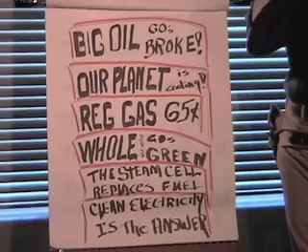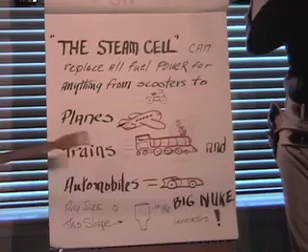Hi folks, I have something free for you. My name is Teddy Daw, I'm the medicine man. Of all the things in this whole world that might do the most to save our planet, it could be my steam cell.

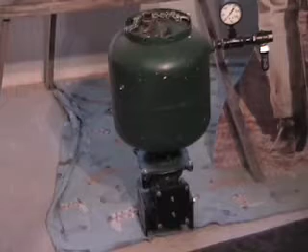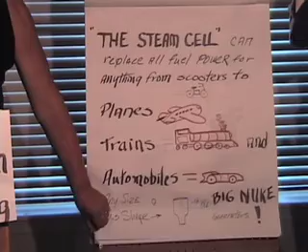It simply makes steam from electricity, a small portion of electricity that it creates. Here is the original prototype, very crude and lame. I show it only for size. This is about the size you would need to drive your automobile, a truck, or produce the current for your home. The steam cell will replace the boiler in a steam generating system.

The steam cell is a dry, sealed chamber. There's no water level. Now this is the shape we need, though it can be any size—small enough for a scooter or large enough to run a large nuke generator.

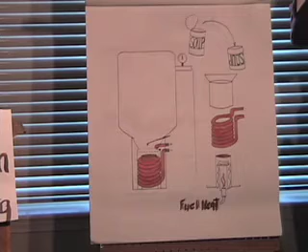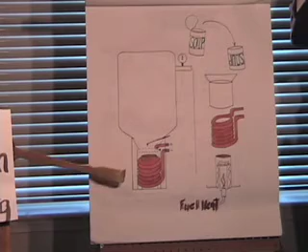Now this is not that hard, folks. Down here at the bottom is where all of the moisture is directed, which would be both injected water from the injector here or condensation. Now as you can see, there's no water level in the steam cell, and we only need enough energy to heat the core, this little plate here about 2 inches in diameter. This would be big enough to power a car.

Now the good thing about steam is there are no bounds to the power of pure pressure, like when Mother Nature blew the top from Mount St. Helens up here a while back, with many megatons of steam power.

This works kind of like in my sweat lodge. I just sprinkle a few drops of water on the hot rocks and poof, instant steam. In this case, the hot rocks are actually this little red hot plate right here.

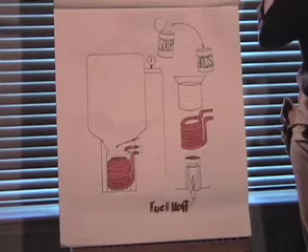The power comes from the loop when it's used with a turbine, a generator, and a battery pack. Then a portion of the electricity generated is returned to the glow plug element.

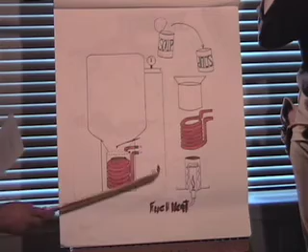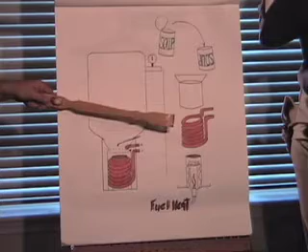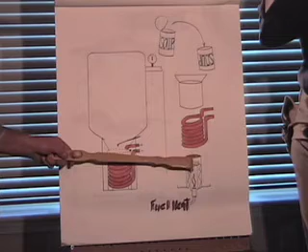The heat core is basically a canister, like an open soup can turned upside down, with the open end at the bottom, actually on the outside of the sealed cell, where a fuel fire can be directed to heat the inside of the canister. The closed end at the top becomes the flash plate, where the drops of hot water are directed, and it appears as a pedestal from the inside of the sealed cell with an electric glow plug coil wrapped around it and a metal skin around the outside of that coil.

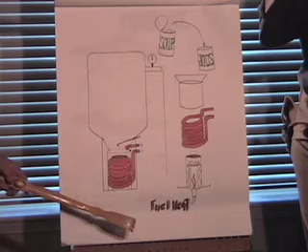Not until the heat core is heated, either from a fuel fire from the outside below or from the electric coil on the inside, not until the heat core is heated to the proper temperature is a fine mist of hot water added and funneled to the bare red hot metal of the flash plate, and then it must drip down over the hot electric coils within the confinement of the outside skin, where there is no escape until it bursts instantly into steam.

Hot water dripped on hot metal. At the core of every power generating system is the boiler. Most of the expense of the system is the cost of energy to heat that boiler.

There are several factors that lead to the incredible efficiency of the steam cell. First, we need only heat the amount of water needed to fill a cell with steam, one drop at a time. Steam is steam, and pressure takes on all of the potential of a standard boiler system, including the heating potential. The common boiler must use enough energy to heat thousands of gallons of water and maintain it there at boiling temperature. In the cell, the rate of production is easily controlled with the heat and the amount of water added, and much faster than the standard boiler system.

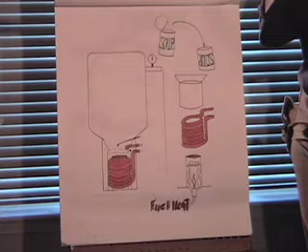The difference between water and steam is only 2 degrees, and when the exhaust from the turbine is recovered and condensed back to water and then re-injected at temperatures well over 200 degrees, then we are talking about raising a few drops of water a very few degrees to become steam and pressure again. Do the math, like the hot dogs would say.

When the cell is in full run, the moisture will seldom touch the bare red hot metal of the heat core before it bursts into steam.

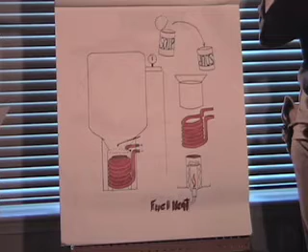The steam cell is totally pollution free because it only recirculates the same water through an enclosed system, no fire, with the exception of the startup fuel fire capabilities.

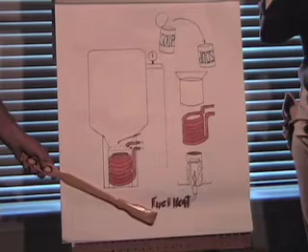The fail-safe capabilities are in the fact that you can heat the core in several ways without the primary source of electricity. The core can be heated with propane, alcohol, or even a hot candle, not to mention the many ways to generate the electricity for the glow plug to start up, such as a battery pack charged by the generator, a windmill, or even a hand crank.

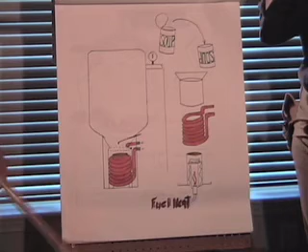Now let me show you something about my simple paddle wheel turbine.

That's very efficient, high torque, low RPM, almost as strong as one piston coming up right behind another. Nothing touches, no valves, one single motion. Now down here, here's the nozzle, the input, pressure, and the exhaust.

This is what it looks like in a cutaway view. Now down here is how it would fit into a generating embodiment. This is the fuel cell here.

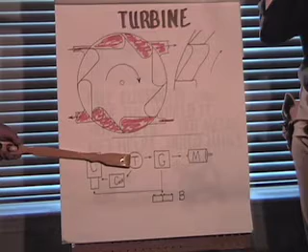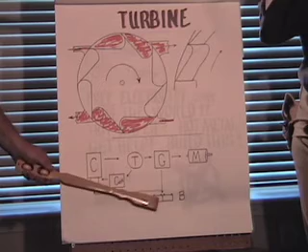Pump steam pressure over to the turbine, then to a generator, and the generator would then produce the electricity for the motor to charge the batteries and return a small portion back to the cell.

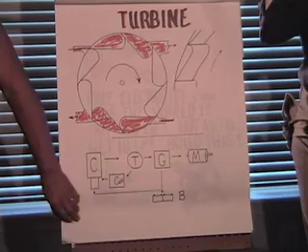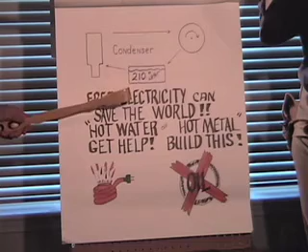If we look closer at the main components of my system, we can see the astounding potential. Here is the condenser that plays a very vital part of the efficiency of this positive energy loop.

These three items here, if we pull them out of this common system, this is how they work together. The exhaust from the turbine is captured and returned back to water, where it will be re-injected at temperatures nearing 210 degrees. This will maximize the efficiency.

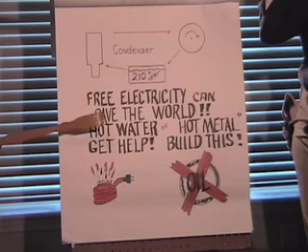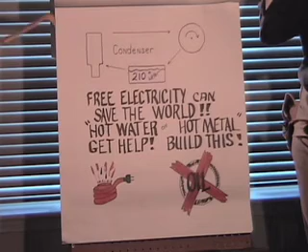The end result: when we put the steam cell in a unit with a paddle wheel turbine, a generator, a condenser, and a battery pack, we have created a positive energy loop that will produce many times more power than needed to activate the system.

Now you know someone who can help you build this thing on your lunch break tomorrow. Let's get out there and get it going and tell the world about it. I am the Medicine Man, and I approve this message.